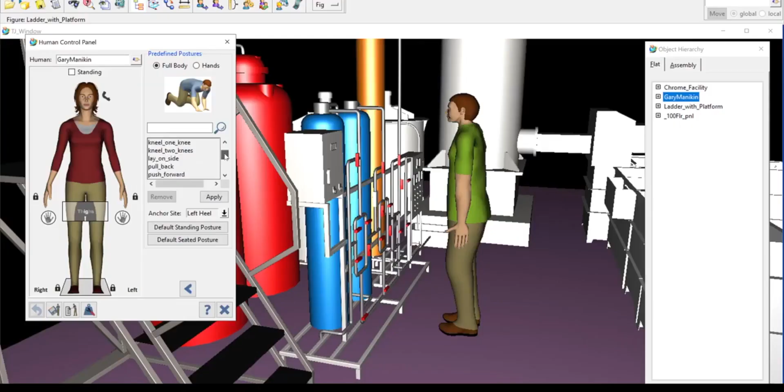Part of the marketing material work included building the Canary Designs YouTube channel. The aim was to showcase some of the techniques and tools we use, and also to raise some awareness of the subject, as it is commonly misunderstood by the general public.

Creating the 3-part series on digital human modelling helped me better understand the technique, but also to develop my skills in Jack, as I hadn't had much experience using it before.

Throughout the year I also worked on a range of brochures aimed at helping with the marketing for the company. Many were tailored to specific industries, such as nuclear or search and rescue. I also produced a hiring brochure which was published and distributed at the CIEHF Careers Fair back in February.

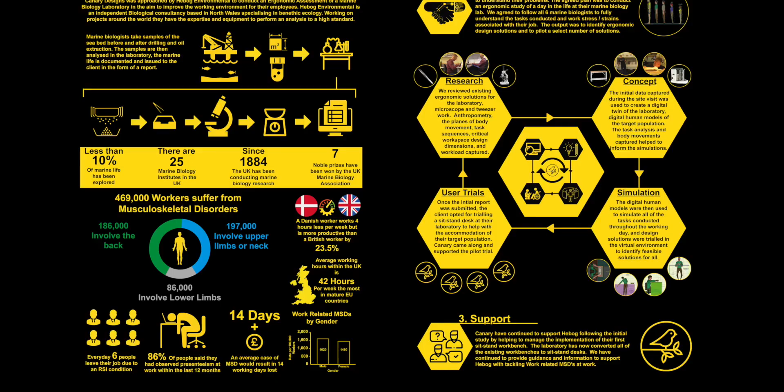Producing these brochures throughout the year utilised a lot of the skills I had learned from the design communication module in second year, and has been further developed as I was mentored by John.

Although I've not been a large part of the journey due to being on furlough, Canary Designs is also working on an e-commerce system on the website. I did create a draft site map for this, in which I learned that the key is to get the customer to check out with the shortest possible route.

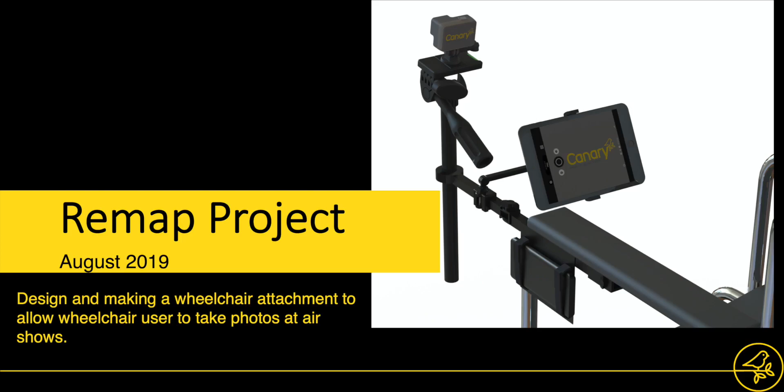A project I learned a significant amount from was the collaboration Canary Designs did with the Remap charity. Remap is a nationwide charity which makes equipment to help people live more independent lives, and Canary Designs worked with the local North Wales panel for this project.

I was challenged with designing a wheelchair attachment for a wheelchair user who wanted to take pictures of aircraft at air shows. I talked about this project in a lot more depth during my November placement visit, so I'll only briefly cover the key details now.

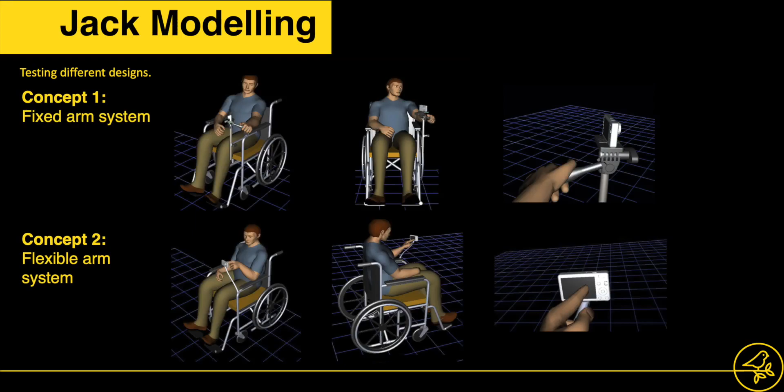What really made this project interesting and memorable for me was that it allowed me to practice the principles of user-centered design, which I'd been learning about in a practical way. I used Solidworks and Jack to recreate the wheelchair and the user digitally through measurements taken during the visit.

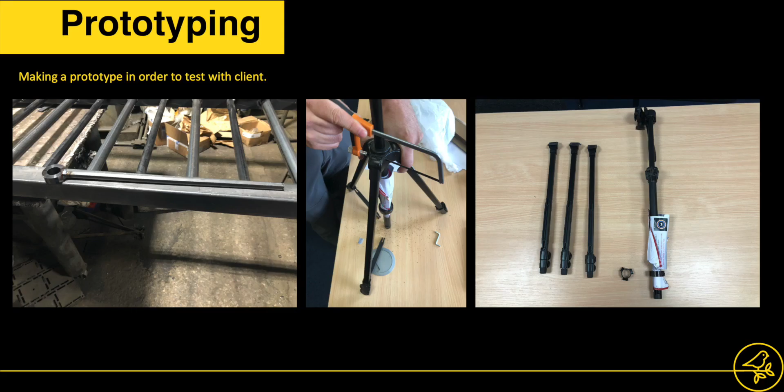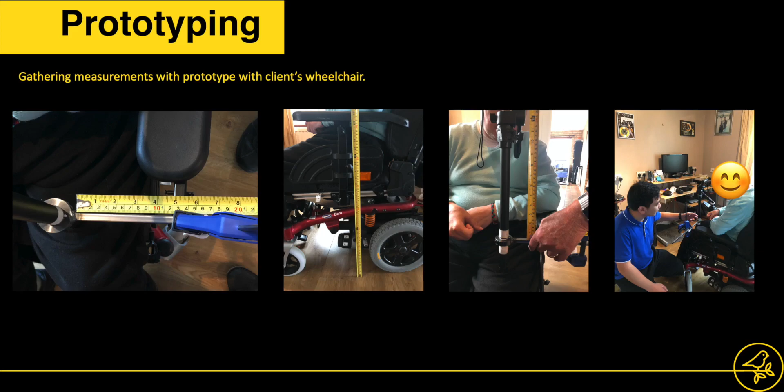This meant I was able to try out multiple different designs quickly before finalising one to develop further. Although it was a great project on multiple levels, I also learned a lot, including managing client expectations and testing equipment fully before you deliver.

Through this project I also learned about compromise and researching off-the-shelf solutions in order to make your design work, as the company was working to a tight budget, since their services were volunteered for this project and weren't being paid for. So I had to work quickly and efficiently.

However, for me, the golden lesson on this project was to work with the user when designing, not to be led by them, and this is a point I will talk about more later in this video. A project which was a landmark for me was this nuclear decommissioning project, as it was my first formal client project.

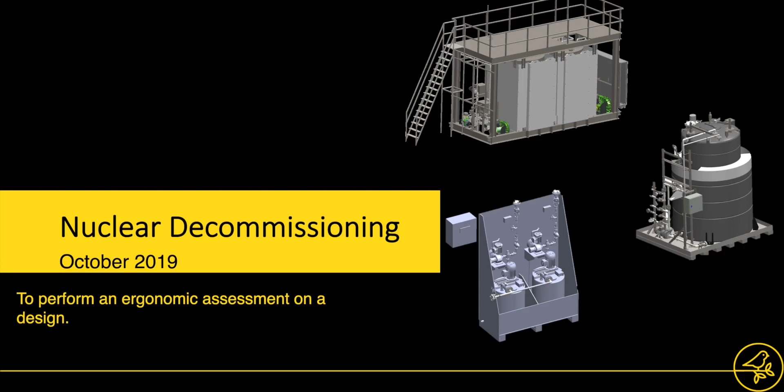Reflecting upon it now, I learned a lot through this project through John's mentoring. The project was to perform an ergonomic assessment on 3 different CAD models. It was through this project that I understood the importance of considering stakeholders, as they all have different tasks to perform on the design.

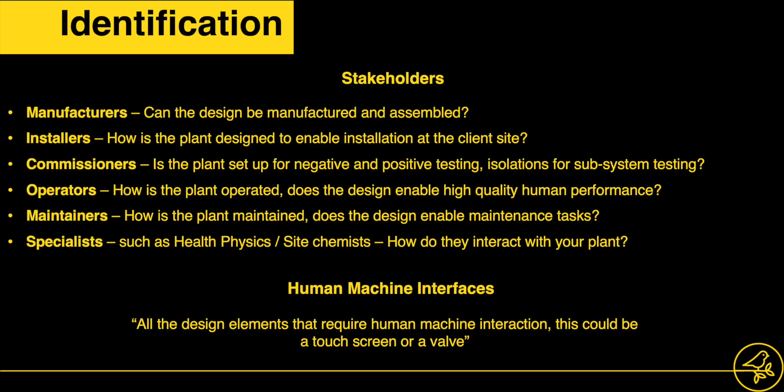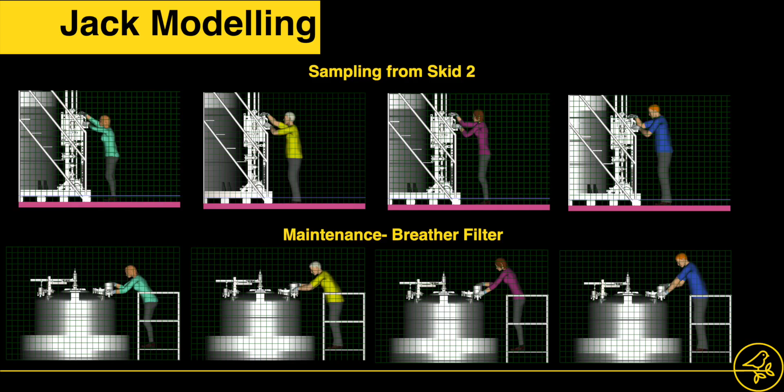It was also when I started to learn how, although Jack is a very powerful tool, you need to use it effectively to get the most of it, such as simulating accurate and representative posture for the mannequins. It was also through this project that I learned how to use ISO standards to assess a design, a skill which I found very transferable to other projects moving forward.

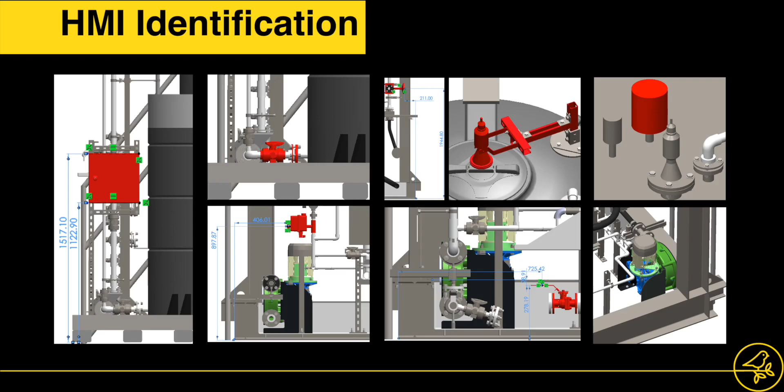We also did a little bit of reverse mentoring on this project, in which I used my SolidWorks knowledge to use colour and smart dimension to highlight where certain human-machine interfaces are in relation to design for the reports. This is another client I really enjoyed working on projects for.

This project looked at laying out a room in a production facility. It allowed me to learn about designing an environment based on the workflow and requirements of different stakeholders. I also used SolidWorks and Jack to experiment with different pieces of equipment and layout in the room.

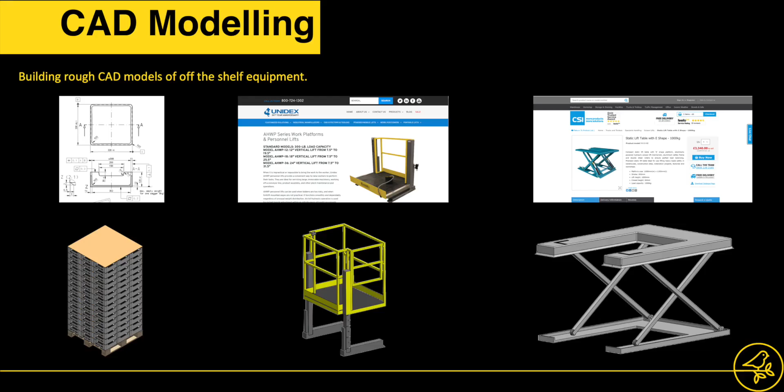Once we had worked out the layout for the room, we also conducted a heart rate trial to understand the workload for the task for the operator, which developed my experimental skills. It was also interesting to perform a workflow calculation to see what resources would be needed to reach the production process goal.

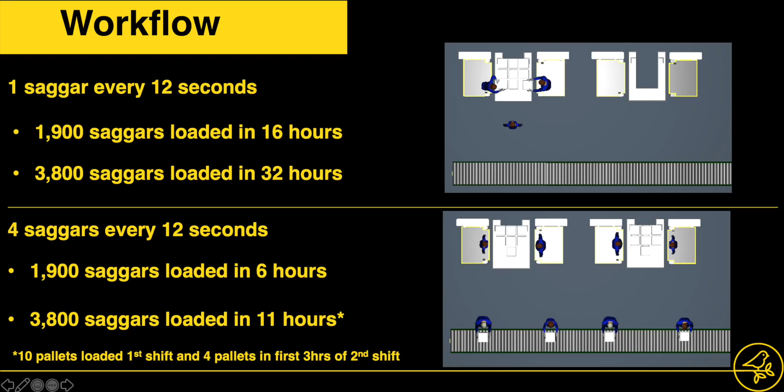It was also through this project that I learned how to use the HSE ART tool. Again, this was another project which I went into far more detail on during my placement visit back in November.

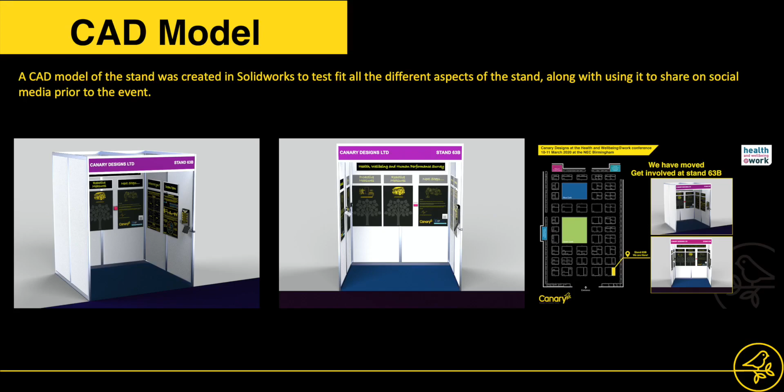A slightly different project I had the opportunity to work on was to design and plan an exhibition stand for Canary Designs at the Health and Wellbeing Conference at the NEC back at the start of March 2020. Based on the information provided by the organisers and the ideas which John had, I created a virtual model of how the stand would look in SolidWorks.

Other graphical packages were used to produce the boards and banners used for the stand. The Canary Design stand at the exhibition was slightly different, as we had focused it to be a workshop for people to participate in, which aimed to increase audience engagement and involvement.

Beyond the design and planning for the event, such as the logistics and everything behind the scenes, I found it very rewarding seeing it all come together on the day. The entire experience of attending a conference as an exhibitor was also invaluable, as I learned things such as talking to people who are walking by and how to best sell the services you provide to people.

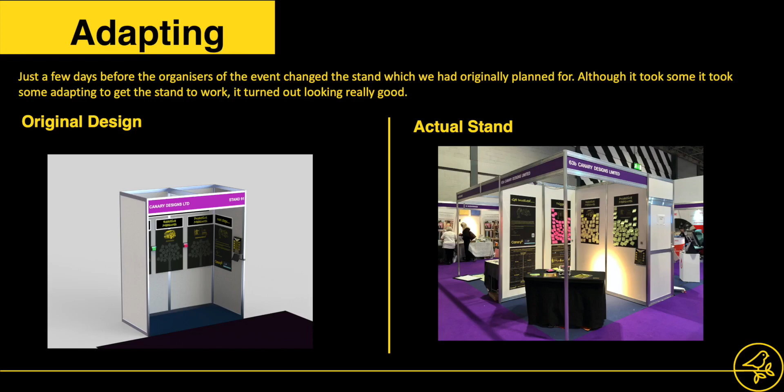Along with thinking on your feet, as the design of the stand which we planned and based everything upon was changed only a few days before the event, so we didn't have time to change everything else, we just had to adapt. However, I think the stand turned out looking great and Canary had a great turnout from the event.

I also worked on another nuclear decommissioning project this year. However, I was not involved from the beginning, as John did some work on the initial design around 12-18 months ago. My involvement started with attending the factory acceptance test, known as a FAT, with John.

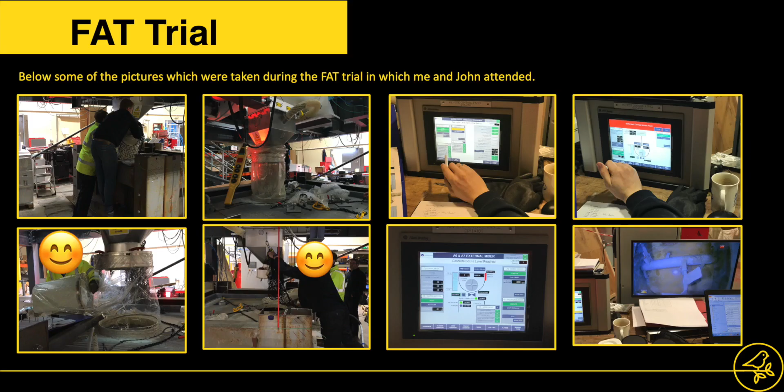The FAT trial is when the design has been built and is undergoing some testing before being implemented. The client invited Canary Designs to the FAT trial in order to see how the system is used and provide some human factor support where applicable.

On the day of the FAT trial, me and John watched the different tasks the team had to perform and took some videos and photos throughout the day in order to have a record for when we formally review it back in the office. This was when I learned that the key to filming people performing these tasks is to capture the entire body posture and not just what they are interacting with.

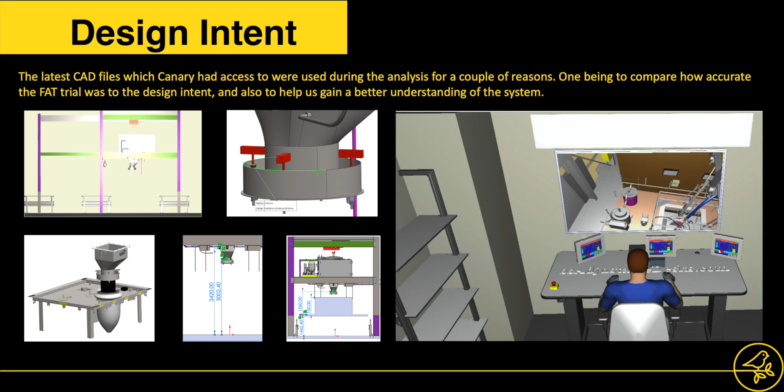After gathering the data from the FAT trial, we began to analyse it in the office. John found the latest CAD model which we had access to in order to compare with what we observed during the FAT trial. In order to understand the tasks the team performed and the postures they used, a series of screenshots from the video were taken to produce a storyboard for the process.

This will also become a very useful feature when simulating the postures with the target population in Jack when testing the design intent. This is a way of working which I have found extremely useful and one which I continue to use whenever applicable.

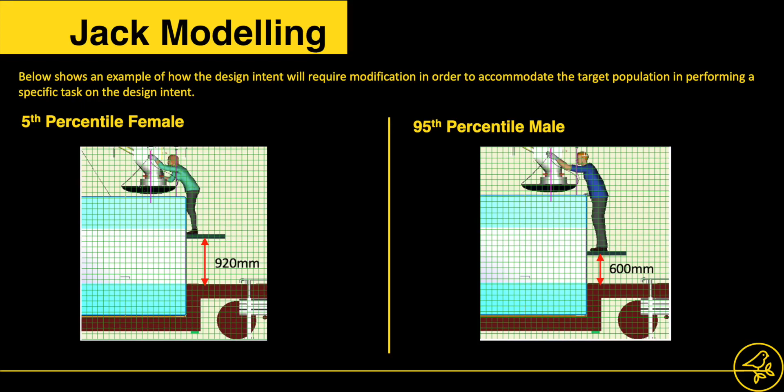During the analysis, an area which was investigated in more detail was the bagging sequence. The original design was complex and required multiple steps and two people to complete, as it required the bag to be trimmed and sealed by crimping before being wrapped with a mesh netting. A solution was provided to the client in the form of using industrial sealing clips, which would make the entire process simpler and more straightforward for the operators.

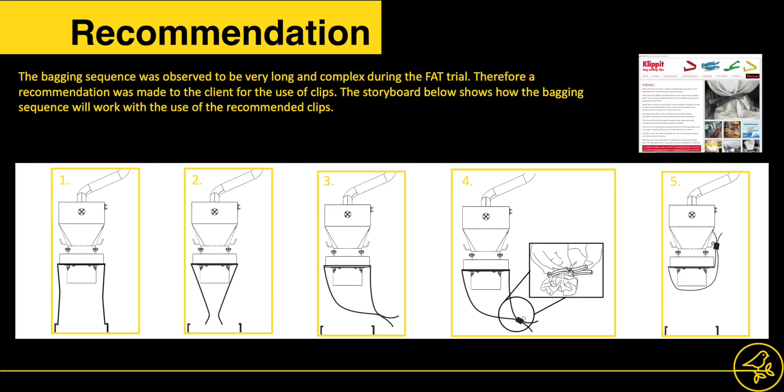Other findings from the analysis show that the height simulated during the FAT trial to perform this task was higher than the design intent, which means that in order for the design intent to work, some modifications to lift the operator higher up will be needed, otherwise they will be unable to reach the bag.

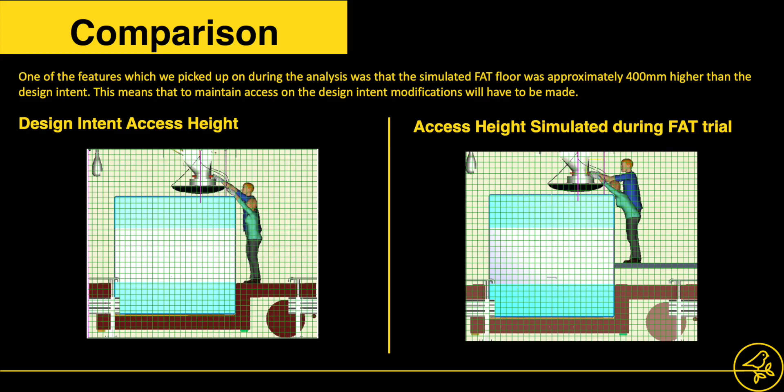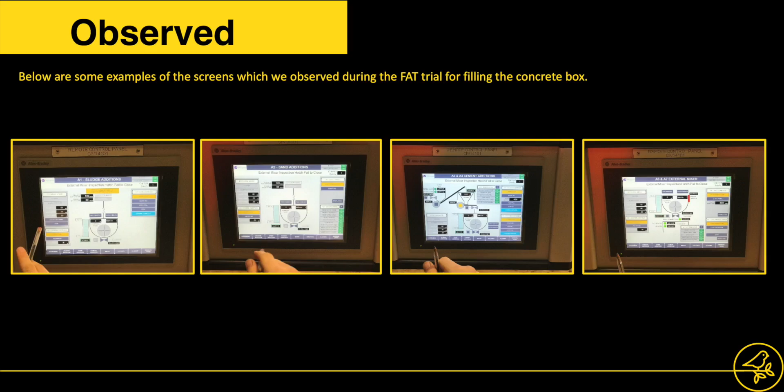Part of the solution we provided for the client on this project was also a redesign of the SCADA control screens. Analysing the FAT trial screens showed that they were confusing and cluttered, as things were tightly packed into a small screen. This was when John educated me on how problematic a poorly designed graphical user interface can be when the system is implemented, from his experience.

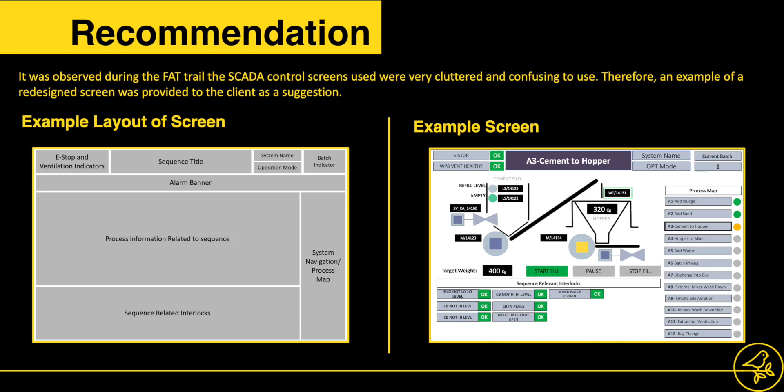It was also through this part of the project that I learned more about graphical user interface design, an area in which John has some experience. Some of the things I learned include the importance of having a sequence indicator to tell the operator where they are, along with the best place to lay out elements such as interlocks and alarms.

Similar to the other project, we were given the option to design the room as we believe is most suitable for the tasks required to be performed by the operator, as it is still a new facility which is in the design phase. The BBPS system would be used for packing large 1-ton bags full of substance.

What made this project more interesting for me personally was that it was very different from other projects I've worked on to date, as I had to research into the different systems available on the market which were able to perform the bagging tasks required.

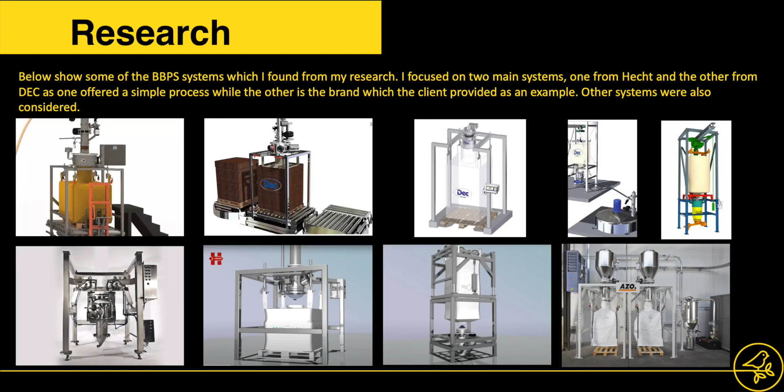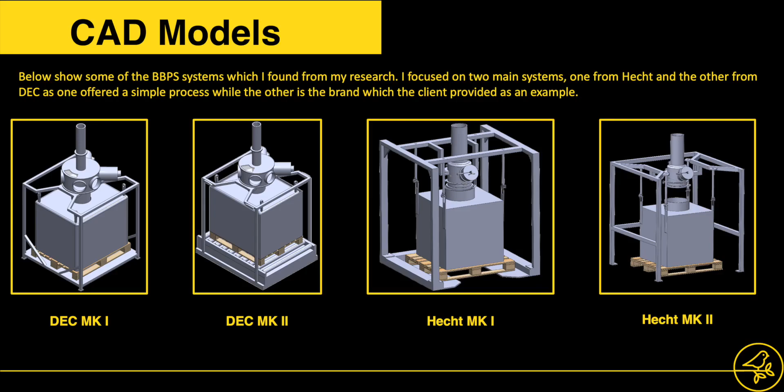Once I did this research, I produced four different CAD models of the systems. These CAD models were made in Solidworks and were not all dimensionally accurate, as many of these systems did not have any dimensional data available, as I assumed that many of them would be custom made for the client.

Therefore, many of the dimensions were from photogrammetry, which is a skill that John has taught me and I have slowly developed, along with dimensions of the initial system the client provided us with, and standardized dimensions for features such as the large 1-ton bag and the pallets.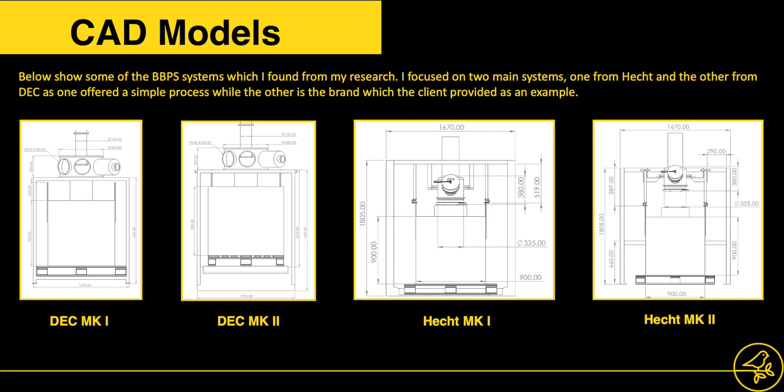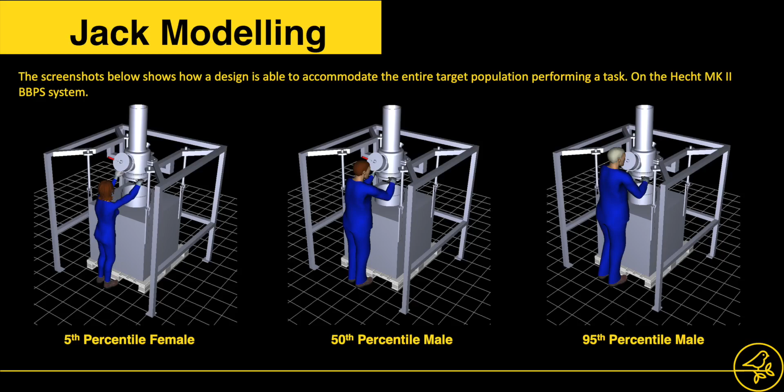Once the different BBPS systems were built, they were transferred into Jack and we simulated the task sequence with the target population which we built from the previous project, which I talked about a little more during the November placement visit. However, each BBPS design was assessed on whether it allowed the target population to perform a step in the task sequence.

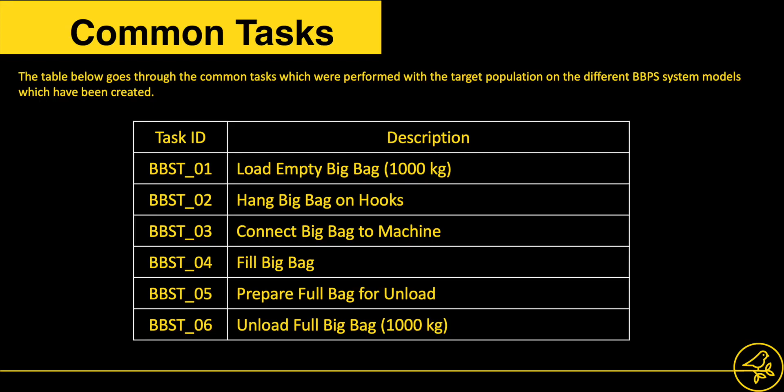This task sequence was kept generic, featuring steps such as align bag or seal bag. By keeping these generic common tasks across all systems, it allowed the task sequence to become the criteria for the optioneering study. It was also through this project that I learned several key practices, one of which is to evaluate systems out of context first.

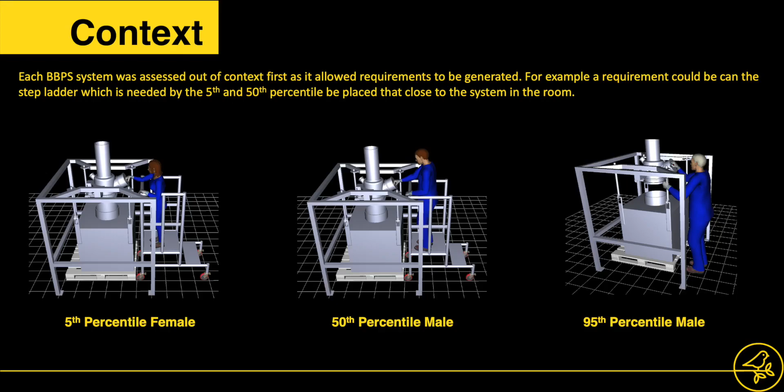You may miss details once you have the system in its context when assessing. I learned that this is a method which can be used to generate user requirements for the system. An example being you may need access to certain elements of the system to perform a task, but it may be restricted once you put it into context.

I feel that this optioneering workflow which me and John used for this project is very similar to that of creating a prototype in the design process. By producing a relatively simple CAD model of the system in SolidWorks and transferring it into Jack, it quickly allows us to see whether it is suitable or not, and foresee what problems we may have with the system before progressing any further.